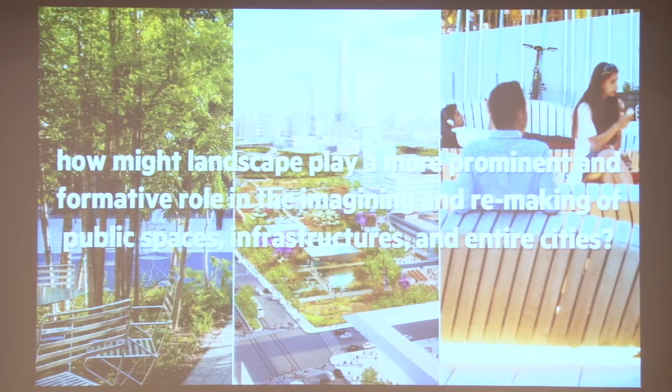The firm itself is a landscape architecture firm plus urban design plus planning. From the moment I started the firm, I had this question, or a form of this question, in mind: how might landscape play a more prominent and formative role in the way that we imagine and also remake public spaces, infrastructure, and entire cities? This is not a landscape architecture that starts with plants or horticulture, although that's very much a part of it. This is landscape architecture that starts from the position of city making, of large-scale systems, of large-scale infrastructures, and how it is that we can coordinate these systems, sometimes at very, very large scales, in order to generate the work that we're doing.

So even though you will see flowers and lush plants in the work we do, that's often not our starting point. What I want to do tonight is give you a sense of what many of the starting points are for our work, and the breadth of issues we've been taking on in the last few years.

As Cathy says, I teach, I do research, and I practice. Oftentimes, teaching is a great opportunity for me to step back from practice and take on bigger issues of climate change and what their implications are on the way that we make cities, the way that we live.

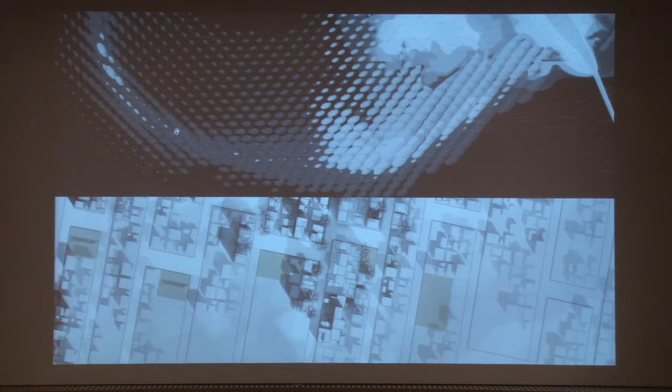For a number of years, we've been working in and around New York City, looking at very dynamic coastlines and how you begin to plan for development, plan for city fabrics and neighborhoods in ways that acknowledge those dynamics, trying to find a way to live with them as opposed to simply resisting them.

Some of the work is quite speculative. Some of it doesn't quite look like city making to the common eye. But there is a lot at work here that's looking both at the very basic building blocks of a city and at the same time at the way dynamic ecologies might begin to inform that.

I've also done some work, particularly in Central and Southern California, a lot of research on the extended metropolitan infrastructures associated with Los Angeles. We've looked at a number of systems, water systems, et cetera, and the consequences of those systems.

So this student pair did some work in the Owens Valley, a place that is now consumed by dust storms as a result of the lake being dewatered.

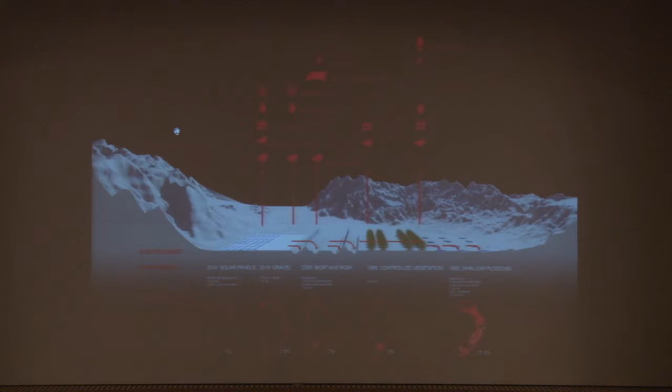These students were interested in cultivating new techniques for how to restore some of those ecologies, how to make what's going on evident to the folks who are out there on tours or doing visits, but also to look at ways that we might begin to replant or recatalyze some of the ecological processes that have been lost on sites like this.

I also do a little bit of research. Cathy mentioned a book I published with an ecologist last year. This book looked at the relationship between ecological research on one hand and design thinking over the last 20 years, and also looking forward.

When I learned ecology, I think when a lot of you learned ecology—not the students, I'm looking at some of the other folks in the room—we all learned about steady-state ecosystems, climax forests, those sorts of things, the idealized state of nature being this stable system.

That whole idea has been turned on its head. Now the idea is that environments are always in a constant state of change, a constant state of flux. And how do we begin to use that knowledge to inform the way we think about designing landscapes and designing cities?

The book itself has a number of essays, but also a number of drawings by ecologists. This is Richard Forman. The previous one was H.T. Odum, very famous ecologists who have had a lot of impact on the way that designers think.

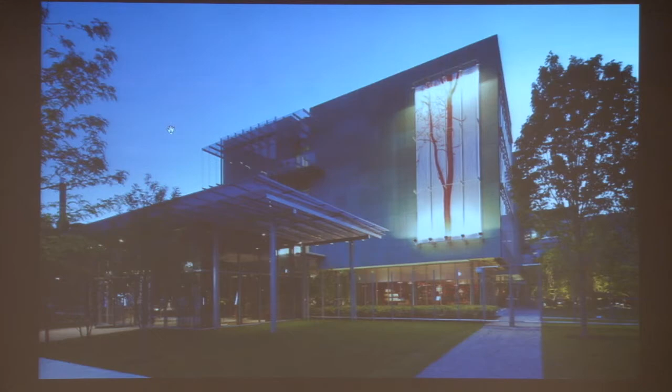The new building radically opens itself to the city, to the Fens, and to the landscape around it. It does so not only by opening the building to the gardens, but by creating very clear connections between the interior gardens and the exterior city. It does this on both sides of the museum building, so you always have a sense of the life of the museum and the life of the gardens as you move around and through the city around it.

It was also important, this is Renzo Piano, to set up these interior-exterior relationships. So now when you're sitting in the library, you feel like you're sitting in the garden. A lot of transparency was utilized here, and a lot of choreography of how we can use landscape to intensify architectural moments.

This glass corridor is the connection between the new building and the old building. You now enter the new building and then go through this glass corridor. As you do, you go through an archway of planting. The architect was very interested in making sure that landscape resonated in people's minds as they now enter the old part of the museum.

Things like the greenhouses were also now given a public presence on the street, so that the horticultural workings of the museum could have a public face.

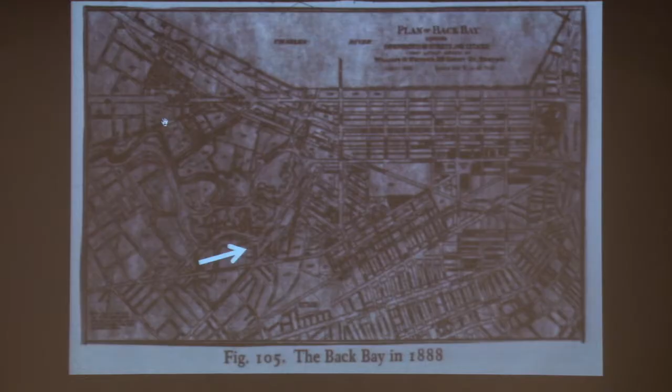What's interesting is that because it was all fill, all the buildings in the Back Bay in this part of Boston were built on wooden pilings. Over time, because we now drain all of our stormwater into pipes that go right out to the river, the groundwater level kept diminishing. That would expose the wooden pilings to air, causing them to disintegrate. Boston reached a crisis point where they realized a good portion of their 19th century building stock might collapse simply because the water wasn't there anymore to preserve the wood pilings.

So every inch of stormwater that now falls on a site like this has to be absorbed into the ground and returned to the ground in place, not carried off. There are extensive techniques using a lot of green infrastructure to simply allow the water to fall onto the ground. We're capturing all the water from the rooftops and putting that into cisterns, which then allow the water to infiltrate as well.

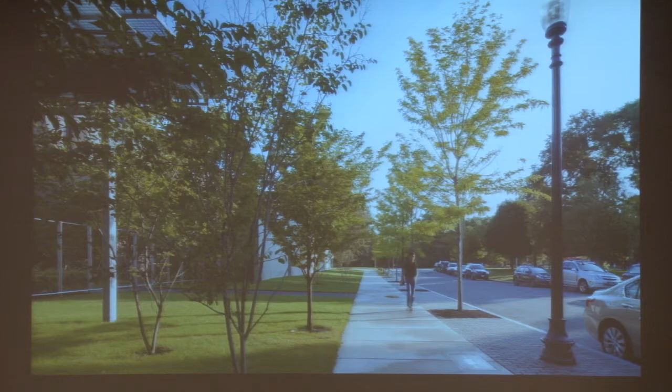That same strategy extends all the way to the curb here, with a very simple set of green infrastructure techniques: a continuous planting bed that nourishes the trees, structural soil, and permeable paving throughout. So every inch is captured and goes back into the ground rather than onto the street. Even the parking lot functions this way. It's quite an interesting situation where this hydrologic issue exposed a construction issue, and now the landscape has to be put to work to help correct this longer-term issue the whole city is dealing with.

In some ways, that project is really quite straightforward and simple in the way that it deals with water. At other times, we're trying to make these connections to ecology a bit more explicit.

It's the first time we showed up to a public meeting to consult with the public, and nobody from the public showed up to talk to us. So that was one of the issues. Eventually, a few condominium buildings were built along here, and in fact a river walk was being built along the Milwaukee River, and this became a pivot point to connect out to the lakeshore system.

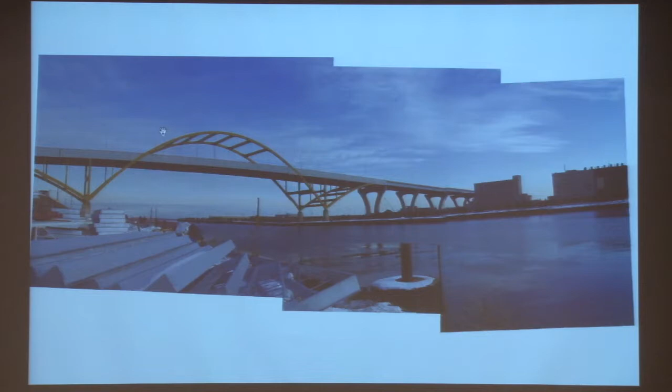This is the site as we found it. There was no ecology here. The site was dead. There were no environmental dynamics at all. So our simple goal in the project was to re-inaugurate some ecological and environmental life, and to make that evident to the people who might come here.

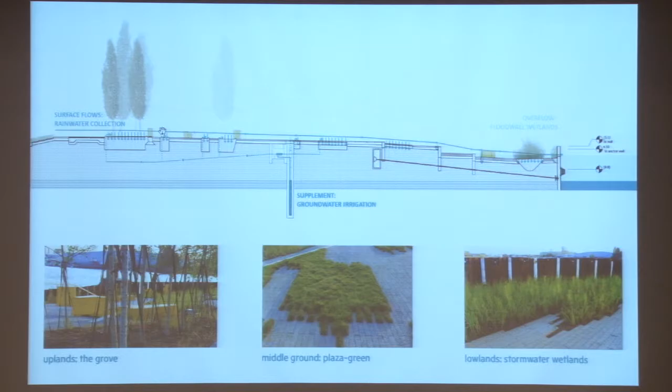We did that simply by redirecting stormwater flow that was already happening on the site. We captured every inch of it again and allowed the water either to infiltrate through the ground to the groundwater table, or to make its way down to the edge of the water, where we allowed the surface water to feed a new wetland, a reconstituted native wetland, very much like the wetland that had once been there before it was displaced by industry. So we're using this on-site waste resource to inaugurate new environmental change on the project.

At the upper end of the plaza is this grove that protects the site from the cold winds coming off the lake. That grove gradually opens up to a lawn and paving surface, and then the site steps down to this new marsh condition, a marsh which is incredibly luxurious in the way it changes over the course of the season. But it's really through the redirection of the stormwater resource that we're able to inaugurate a whole new set of environmental dynamics on the site.

What's interesting too is that this lower area of the plaza will flood at heavy rainfall. And you can see we've also cut slots into the bulkhead wall here so that when the river level is really high, we're giving a place for the water to go. So we're giving water a place in the city, in the plaza, so that people can begin to develop a closer relationship with the environment.

You can also see here how the plaza steps down as it approaches the river, which makes for a nice amphitheater setting where the performance is really the performance of the river, the performance of the environment that people are there to take in. And it's not just people who are new to the neighborhood or just visiting, but some of the old folks too, who have been there the whole time and are now getting cleaner water in the river, which is producing healthier fish populations and making their fishing days much more productive.

We also look at the potential to use building systems to generate or regenerate ecologies that had once been in places. We've done a little bit of work in Dubai along the coast of the UAE, a place where heavy development has displaced a lot of the native mangrove swamps that were there. So we took on a big development project to say, is there a way that we can use the waste resources from the development itself to feed a new set of mangrove gardens?

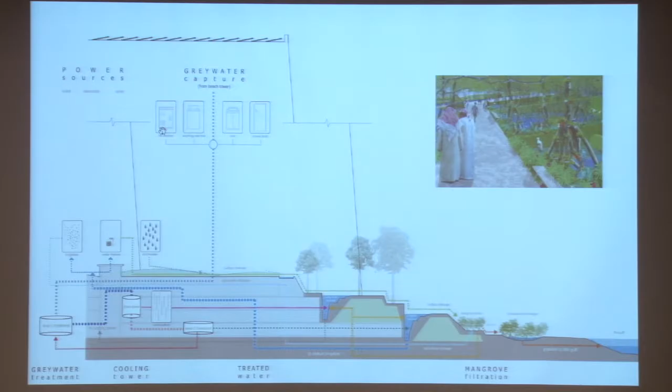So we worked with engineers on this development project to figure out how we could capture all the gray water, clean it, and use some of the landscape terraces associated with the site to help clean the water and upgrade its quality. And as the water became cleaner and cleaner, we would then create a series of gardens for people where we would recreate mangrove habitat, but in the form of gardens.

At this point, the mangroves themselves are also cleaning the water, creating new habitat, and you get this lush, shady set of gardens right along the seashore as a kind of cultural version of an ecological condition.

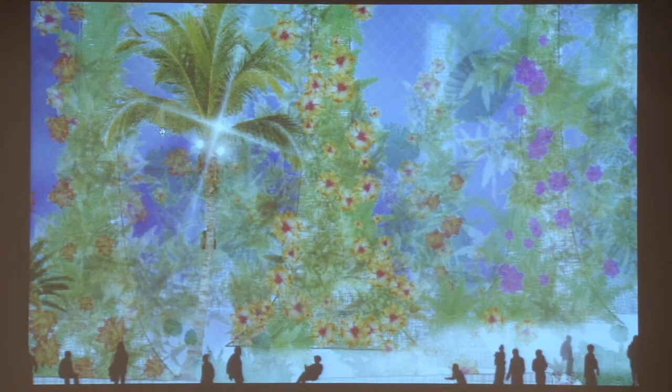We're also recently working with AC condensers and the water that's generated from AC condensers on a development project. Once the water from the air conditioning units is captured, it can be put under a dome into a big waterfall situation that creates an incredibly humid and moist environment, and then we plant a series of very lush botanical gardens in an enclosed space—not using new energy, but using the waste resources from the building system that's already there. So creative ways to use waste resources to generate new kinds of ecologies within the city.

All right, second question. These are not in any particular order, and sometimes the sequencing doesn't make sense. How can we bring a more playful approach to play?

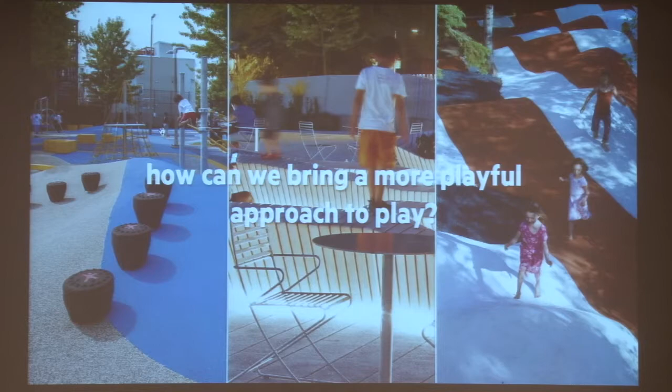I hate playground equipment. My kids sometimes hate playground equipment too. It's gotten better over the last few years. But for me, when my wife had them, I tagged along, I guess. I would watch as the kids just simply walked along the street, and they would make games of hopping from one manhole cover to another. Any marking on the ground they could make a game of. There's this idea about creative and free play—kids are especially curious creatures and they'll just make a game of anything.

We wanted to tap into a little bit of that and really explore the notion of play in the public environment. We became very obsessed with poured-in-place rubber. You see it in a lot of playgrounds these days. It's soft and squishy, usually made from recycled tires or sneakers or something like that.

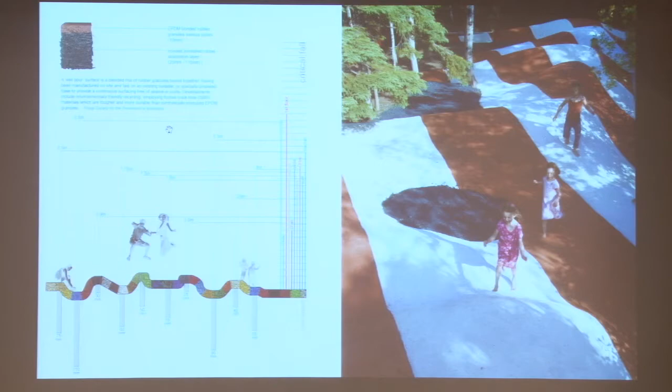Oftentimes it was being used in very flat applications, and we kept playing with the idea of introducing topography in order to create environments that we thought might be more playful. We tried this with a city project, and they were very worried that the techniques we were using hadn't been tested. So we had the opportunity to test this in a garden festival up in Grand Métis, Quebec.

This is a garden festival that's run every year. There's a set of old gardens, and they do an international garden festival with a number of changing gardens. We named our installation Safe Zone.

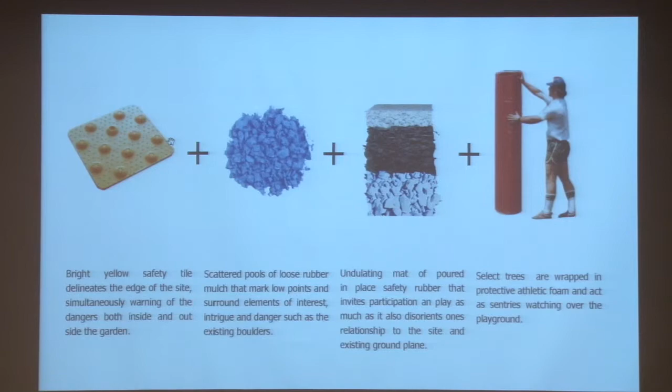What we did was use all the safety products that we could find that are typically used in landscapes—not only the poured-in-place rubber, but rubber mulch, warning strips to make sure everybody was aware as you entered the garden this was maybe not a safe place, as well as bumpers for trees. Essentially we sculpted the rubber across this very undulating landscape in order to create a number of conditions that we thought people might be interested in exploring.

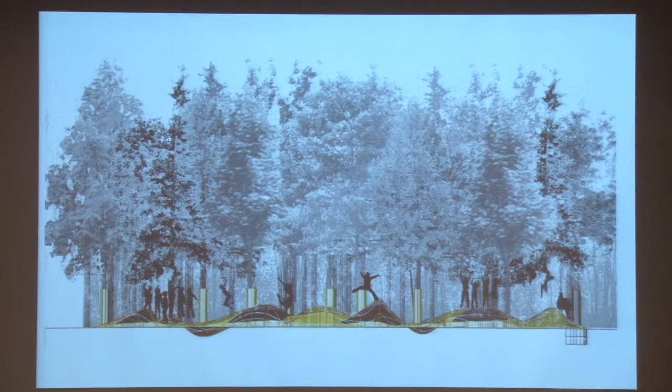Here you can see a three-dimensional version of it. We happened to get this site that was wooded, which was also great. The rubber is permeable, so it allows the water through to the tree roots as well. But since there were trees there, we thought we had to give those guys bumpers too, either to protect the trees from the kids or to protect the kids from the trees. We weren't quite sure. So this is what it looked like in its first version.

The yellow and black here is the poured-in-place rubber, and the blue is the loose rubber granules. As soon as kids were allowed into it, they immediately took to it and started playing games, running and bouncing over the surface. You can see here how they run up and down. Kids are amazing at the way they will just engage a landscape like this.

We were also fortunate to have the construction supervisor kind of push people into the project. He had to do that with adults—kids would go in on their own. He'd also encourage adults to take their shoes off so they could really feel the squishiness of it. We also did something quite insidious.

The code that you use for the thickness of the surface depends on the distance of your fall. So if you're falling from a high distance, you have to do a much thicker mat, which is much springier. And if you're falling from a low distance, it's a much thinner mat.

This has had a lot of impact, not only on the way that we design playgrounds now, but also in the way that we think of public space. We're currently working on an unusual project. It's a streetscape project that's meant for movement. It's in a tough working class neighborhood in Syracuse, New York. It's a neighborhood that suffers from obesity, and the client wanted to make a streetscape that was all about movement and encouraging people to move.

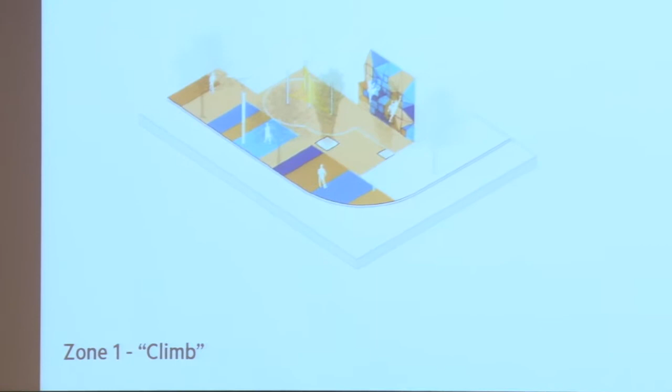This was a competition, so it's all about taking 5 blocks along the street, along with a couple individual lots, and finding ways to encourage people to move. So we have one site that's all about spinning, using spinny things and swings and all sorts of things. We have one site that's all about climbing, where we've taken the rubber surface of the ground and put it up on the wall and created an environment for people to climb up onto the wall of a building using netting.

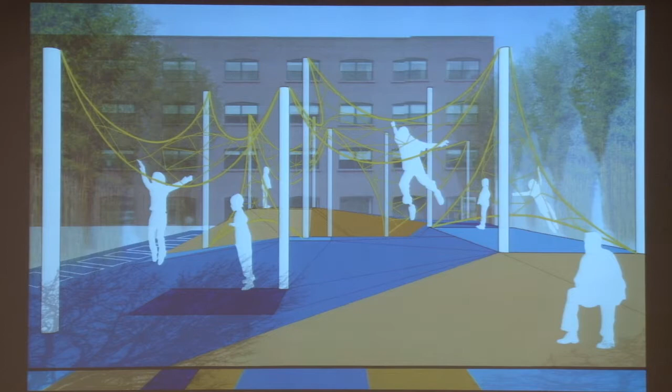And then probably the most fun part of it, the bouncy space. This is a space both with an undulating topography and an overhead net. You can see it here as a way to simply encourage people to get out and exercise.

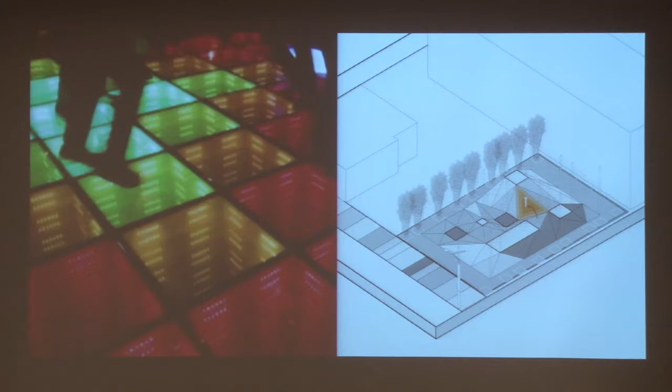But we've added a twist to this one in that we're also interested in using this technology called piezoelectricity, where as you bounce on a panel, it'll generate electricity, and in this case, will also generate light. So the idea is if we can embed this in the surface, as somebody hops around the site, different parts of the site will be illuminated, so they can create a game of moving around the site as they're bouncing from one place to another.

These experiments have all led to not just the way that we think about playgrounds, but the way that we think about social spaces and people, and the way that we design for people to engage public space, in ways that are sometimes familiar, sometimes unfamiliar, really engaging their sense of curiosity.

We're quite interested in the things that people do, not only when they're doing some activity or hanging out with their friends, but we're also interested in the odd and funny things that people do as well.

Or the way that people will find their own space. These are 2 of my favorite ladies who have decided they're going to make their own street front cafe by squeezing themselves in between 2 cars. This is just the stuff people do. And we want to play on that, play off that, and use that thinking as we begin to design public spaces as well.

And so the question here becomes, how can we instigate social interactions and animate social space? Not landscape as a background, but something that really encourages people to get out and do things.

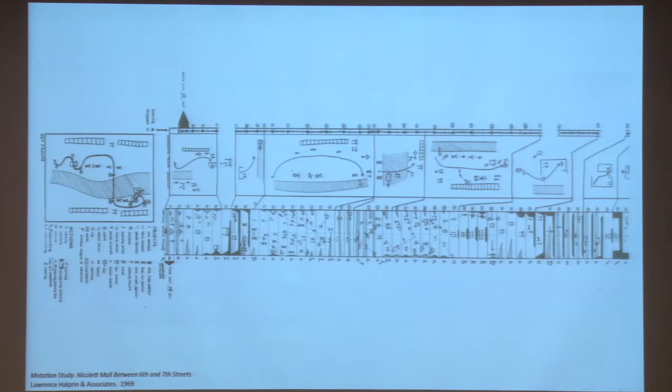Of course, there are some historical references here. This is a drawing by Larry Halprin, a landscape architect. This is the Nicollet Mall project. Of course, his wife was a choreographer, and so they made all these notations about the way people might move through public space, and then we kind of build a design around their movement.

We also refer to the work of William Whyte, who studied people's behavior in public spaces, not as a designer, but as a sociologist. How is it that people moved, in this case, across the plaza in front of the Seagram's building in New York, according to the time of day, whether it was lunchtime or not, and according to where the shadow of the buildings nearby fell.

And so in even these mundane spaces, he was finding some really interesting information on the way that people behaved. We used some of that on the redesign of this space at Harvard University.

This is historic Harvard Yard here. This is a tunnel, a road tunnel that had been sunk so that the campus could be extended over. And we've got a 1972 building by Sert, a historic building here. There's a Pete Walker Tanner fountain right at this location, and of course some of the oldest buildings at Harvard Yard here, as well as new dorms from the 80s here.

So, complicated site. Harvard finally gave us a project, and they gave us their toughest site and said, go at it, but you have no ground. There's nothing underneath you but roadway.

This is the site as we found it. Pretty bad shape. It was really a cut-through site. 10 to 15,000 people a day, we're told, moved through this space. But they moved as quickly as possible. There was nothing to do in that space. Sometimes the weather was really raw. And you can see it's quite worn out.

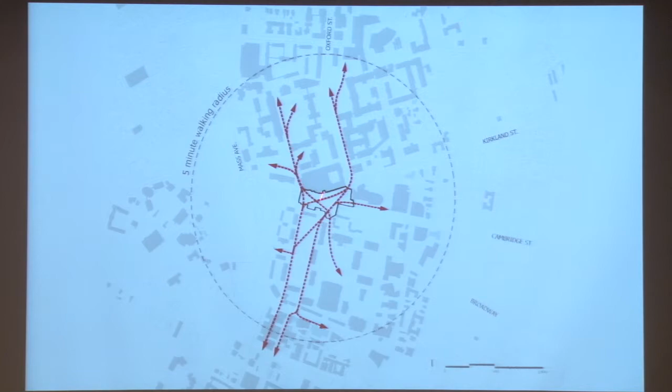It's fairly narrow paths. You had tour groups. The university would often put tents out there, but the tents would become quite muddy during events if it rained. So it was an overly used space, but it wasn't designed for any of these uses. It was intense in terms of circulation because you had all the folks moving between the main campus and the north campus of Harvard, but also this is Harvard Square, where there's a T-stop, and you've got people moving through that space to their residential neighborhoods to the north as well.

So we had to design it to accommodate flows of people first, and of course we choreograph the ways in which they might move through that space, but notice we're not trying to keep them on individual pathways. We're creating a surface where people can move across that surface a little bit more fluidly.

The surface is very simple. The project's very simple. It's really about pavers and benches that accommodate not only movement of pedestrians, but also movement of bicycles through that space.

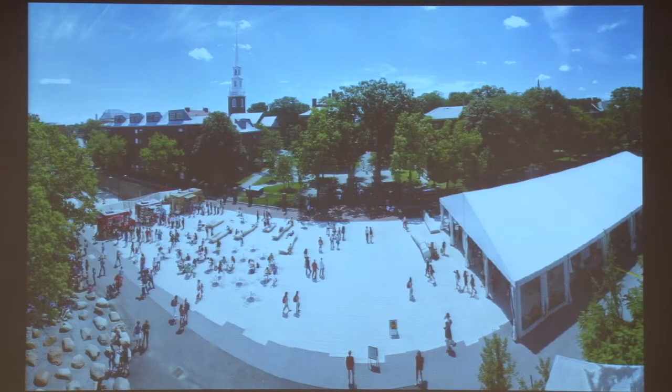In some ways, it's a radical transformation. It looks simple, but the surface itself is really highly engineered. You've got tent foundations, utility hookups, water, power, lighting, all the functions you need in order to host an array of events on a changing basis.

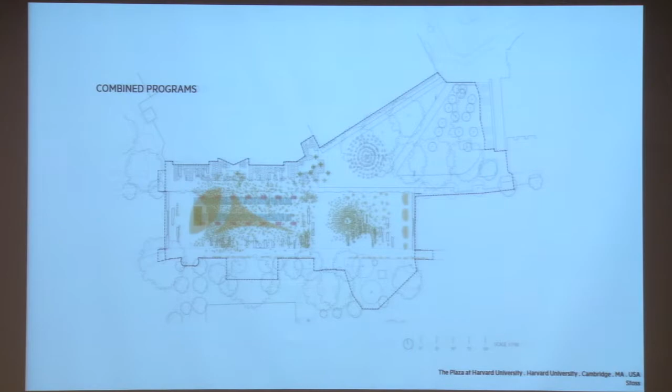The university was very interested in using this as a central destination space for people across the university community and the community at large to come together. So we began to design the space around different configurations of programs and activities, setting up the site in different ways and allowing a built-in flexibility that allows for things like crafts fairs, music festivals, lunchtime concerts, farmers markets, boxing matches by the student boxing club, formal performances by folks they bring in, ice skating during the winter, even curling during the winter.

You can see a little bit of the snow from this past winter. So it's become even a space for public protests. This was the first time - the university has been so good at programming the space that it wasn't until this past December that the space was quiet enough for students to lead a protest. And it was great to see it being used as a real civic space.

And so we have our own choreography, our own schedules about the way that space is constantly utilized as this new flexible space. But we also wanted it to be used for the everyday. It wasn't just going to be a destination space that was then empty the rest of the time.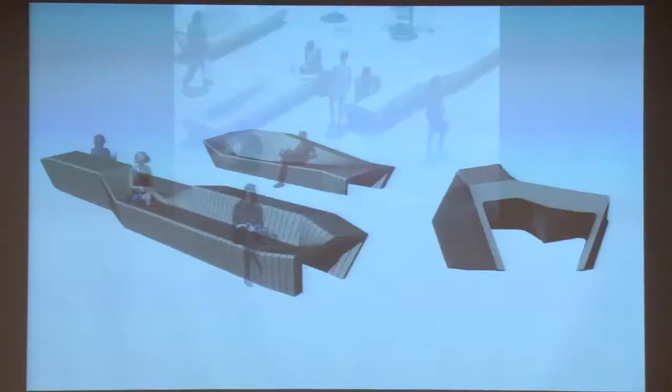So we took care to design seating in ways that would encourage people to linger. We have a philosophy: if you give people a place to sit, if you give them food, and you give them something to do, you've pretty much created a pretty good public space.

We spent a lot of time on the seating here. We were interested in creating benches that weren't one type fits all. So you can see here the way that these benches work - they have different heights of back, different elevations of where the seat is. There are also variations in the surface of the seat so that you can have one, sometimes two people. The idea was to create flexibility within the seating so that people could really pick their own place.

They could find the spot that's most comfortable for them, for their bodies, or would best fit their mood for that particular day. So you can see people sitting, lounging, chilling out here. This guy's scratching his belly at lunch, but he's found his own place to be comfortable within that space. A mother and some kids.

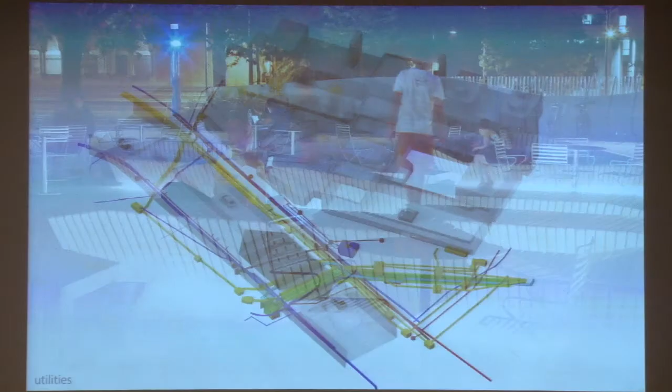These sorts of benches are designed in a way that allows people to find the place that's most comfortable for them. It's used in conjunction with movable furniture that allows people to move things around as well.

A very complicated project with a lot of utilities, but even the real hardcore infrastructure of the project is civilized. This is a crash wall that prevents a truck moving at 30 miles an hour from going over the edge and landing on traffic beneath it. But we designed these crash walls so that they would have wayfinding signage, incorporate seating, and even have a bike rack at the symbolic heart of the campus.

They were well designed to play on light conditions. The concrete elements had a number of different wayfinding devices.

This guy looks like Alex Krieger. I don't know if any of you know Alex Krieger, the urban designer. It cracks me up that a guy who looks like Alex Krieger, who's been teaching at Harvard for many years, needs to look at our map to figure out how to get around.

But of course, the site also works in terms of utilizing stormwater. A lot of the stormwater is collected off to the side where we have a little patch of ground, and we use it to water this really intense planting grove, with garden spaces carved out of the grove so that you have quiet areas alongside more active areas. Again, you're giving people choice and flexibility to do what they want to do while they're there, as opposed to doing what we think they should be doing.

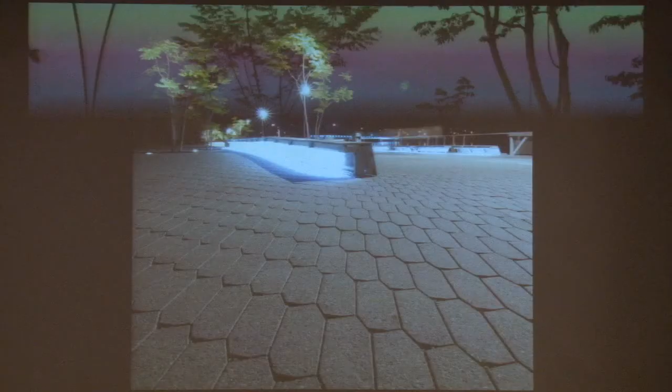Planting here was tricky. Every square inch needed to be paved, so how you then plant within a context like that is quite tricky. The entire surface, or much of it, is a permeable paver that allows water to infiltrate. So we're watering all the roots through high-tech soils, structural soils, beneath the surface.

We also use grade changes to allow for infiltration of other water underneath some of the benches. So where this light is emanating from under the bench, there's a slot that's doing a lot of work collecting storm water and infiltrating it into the ground.

The lighting itself becomes a kind of celebratory thing that changes over the course of the evening. And it's become a place that crowds now come to because there's something to do, a place to hang out. The city, in conjunction with a number of nonprofits, has started to program the space with year-round activity so that people keep coming back and activating that space.

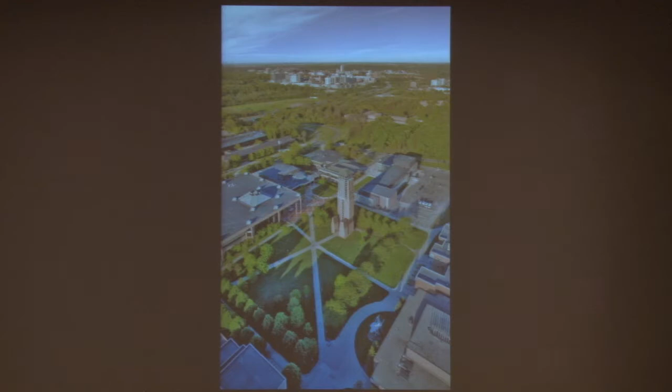We're working on a new project at the University of Michigan: a new campus quad at the heart of North Campus. The main campus is here in the distance, and the expansion campus will be on this North Quad. Currently there are a lot of engineering buildings, the architecture building, and a new performing arts center, but it's also meant to be the new center of university expansion.

So this quad will become the new center of campus life on the North Quad. It's a simple quad, but really kind of monofunctional, meant to get people from one place to another through it. The university was interested in activating this space, and the engineering school dean was interested in the role technology might play in that. So we're redesigning the space to activate it in a number of ways. This is a 4-acre space, as opposed to Harvard's 1-acre space.

This is a space that will remain predominantly green and will still accommodate a lot of the circulation moving through it. But we've done a number of things that are somewhat subtle but amplified here. Instead of straight paths, we've designed paths with areas that allow the path to grow larger, creating little gathering spaces along the way. We've also designed a series of landforms to give a little height and contour, but also to give students a place to hang out and watch the activity on the plaza.

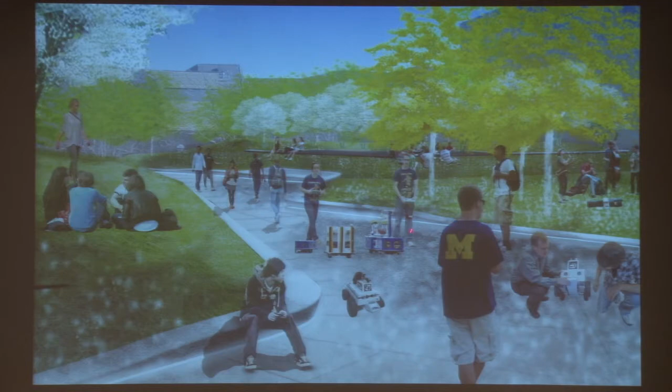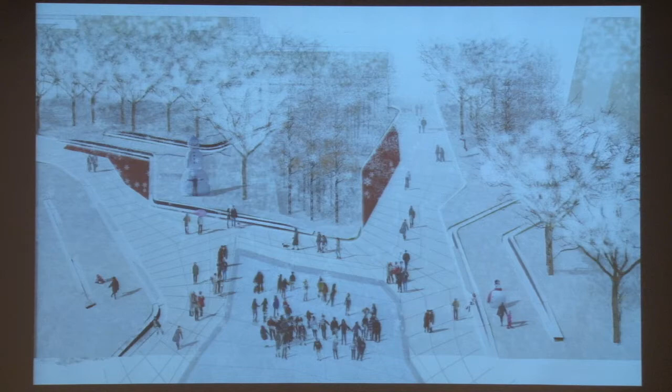The engineering school is good at programming with a lot of their robots and experiments, and they'll often use this space to showcase their work. But it's also a flexible space for different kinds of activities. Here you see it on a normal day, here where there might be a bigger concert, an opening school fair kind of event, or even when you import an ice skating rink for a winter festival. So we're designing something flexible, with all the infrastructure it needs, creating a space good for everyday hangout but also allowing different activities over the course of the year.

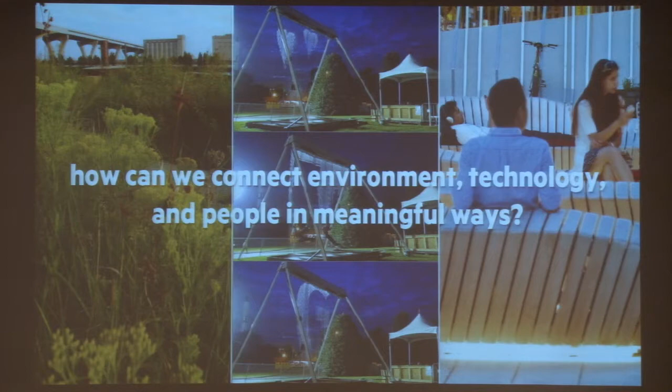The twist on this is yet another question we've been working on in the practice: how is it that we connect environment, technology, and people in meaningful ways? We wanted to move beyond the stormwater infiltration garden, which has been done over and over again, and somehow make that process of capturing and collecting stormwater resonate with people.

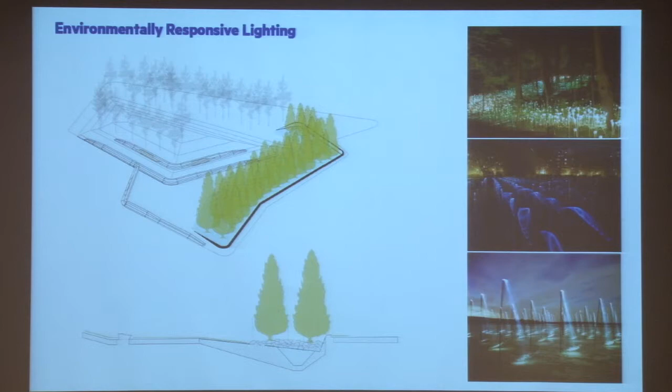We have 5 different stormwater gardens, you can see them here—these are larch trees, here, here, here, here, and one more behind the tower. Essentially they collect all the stormwater from the site into these gardens, planted with prickly larch, ferns, and other plantings below. But we've introduced environmentally responsive lighting within each garden. Every time it rains and stormwater moves into the garden, these lights will flicker, giving a lighting effect that signals to people what's happening in the environment. It's a way to bring this environmental process to life through technology in very simple ways.

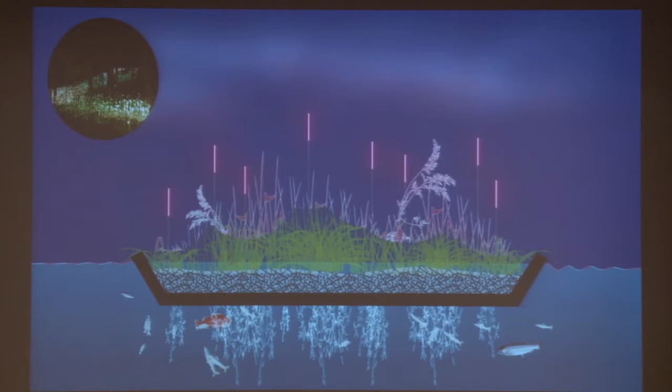We're also experimenting with some floating wetlands that feed fish, and when the fish feed, there's also a twinkling effect on the wetlands.

This one is part of a project we just lost. It was a competition, so there's still a lot of sad people in the office right now.

But this is one where we try to use various technologies to really play with environmental phenomena. This is on the lakefront in Toronto, where they get a lot of fog, on a site that's sort of a viewport. It's also a ferry terminal for getting from downtown to the islands in Toronto Harbor. There are very simple issues, like you can't see anything, the wayfinding's terrible, the existing site isn't well designed, so there are ways we're opening up views and that sort of thing.

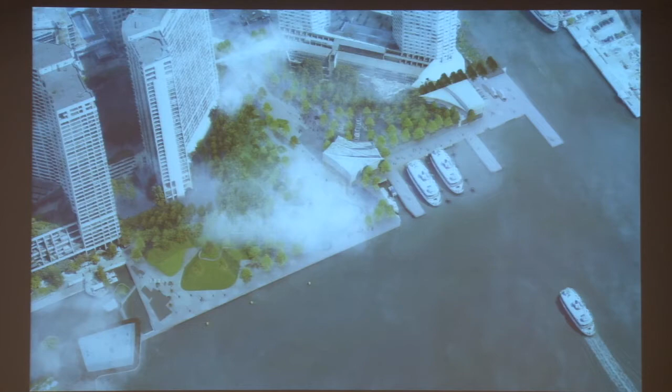We also wanted to create this fantastical place that really played off of and played with the environment, using that as a way to immerse people in a set of environmental conditions that would have a real impact. So this project we called Cloud Park, and we thought of the cloud in a number of ways, thinking about how we could use not only environmental effects, but created environmental effects, to really condition the way people would experience this place throughout the seasons.

We started with a fog gateway as you would enter the park. There's an old bridge here, and we wanted to create a cloud gateway that would begin to change and evolve as the wind blew and as the weather changed, creating this dramatic marker.

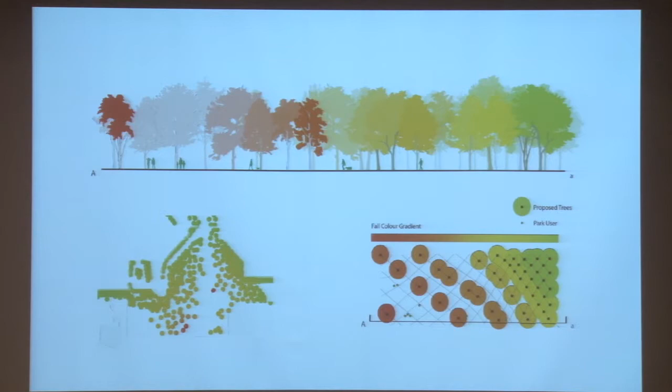We thought in many ways of the tree canopy as its own form of light cloud of foliage, which would intensify in certain ways and dissipate as you move toward the center. We could choreograph the fall foliage of the trees so that the most colorful trees were at the center of the space.

We also looked at a water and ice plaza that would mist during the summer and create some warm fog for ice skating during the winter.

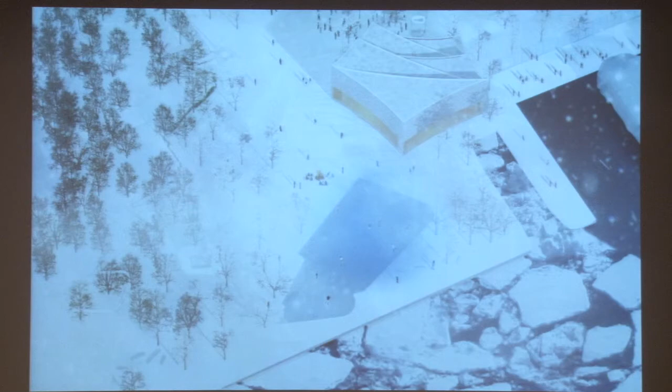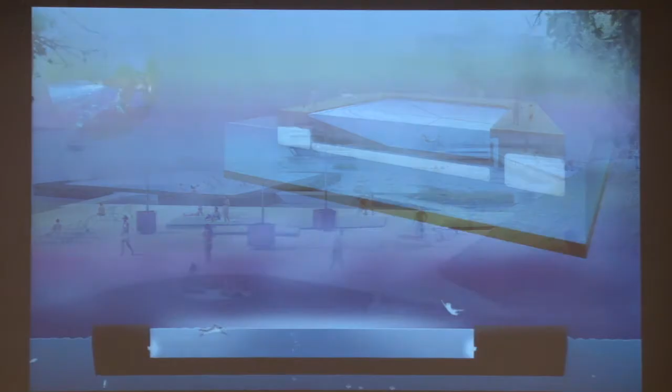We set up a series of floating pools in the basins to create places not only to look over the basin, but to actually get into it. Here are the floating wetlands, floating swimming pools. Here you can see some of the steamy swimming pools, misting to cool people during the summer months, illuminated at night to create a dramatic effect, and a series of floating hot tubs that would let people be in the lake in winter, bathing with some friends. I'd go there.

It's also about realizing the environmental phenomenon can be the marker itself. Everyone kept asking, next to this skyline and these big buildings, what are you going to do? Rather than create a thing, we were creating a spectacle out of the fog itself, something that would constantly change and evolve with the environmental conditions. So again, how do we bring the environment to life using technology?

We also do a lot of work with design and fabrication techniques. I'm going to skip over this one. We design a lot of furniture.

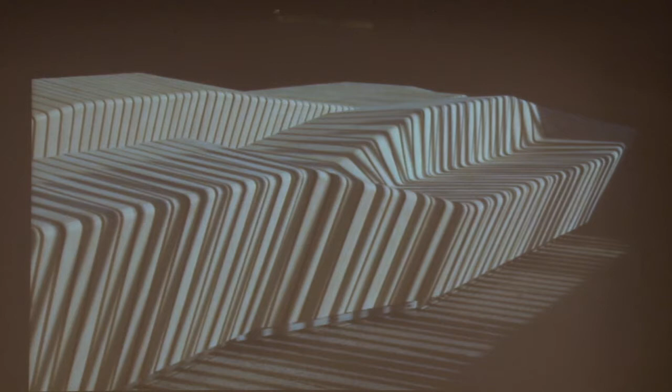We use a lot of new software techniques to design these things, because instead of creating a single bench, we can create a number of different bench conditions very quickly using these techniques. Those software programs fit quite comfortably with the way fabricators work now.

On the benches at Harvard, you can see there's a lot of testing we do in terms of the initial form making, and the evolution of how these things are put together and how they work. On this, each of what looks like 29 different benches is actually only 7 different benches, but each rib on each bench is different. They all taper in a particular way, which seems complicated, except all of that can be computer generated in the fabricator shop.

Also, if one of them gets damaged, they're all numbered, so all they have to do is lift it out, call up the number, remake one of those ribs according to the number, and it's a fairly easy fix.

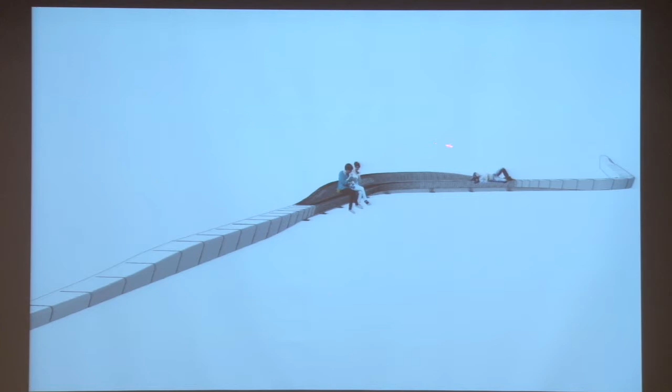At the University of Michigan, we're doing a different kind of bench. This is a snaky bench that starts at a curb, becomes a seat wall, then becomes a bench. Here you can see some of the sinuous forms.

We do a lot of the testing digitally, but these models just came yesterday to the office. So you can see we're testing form, shape, fabrication techniques, the way people sit, the way people can be agitated while they're on the phone, the way she can be quite relaxed there. These are going to be embedded within the landscape, within landforms, so we're also testing the way that they interact with the landforms we've designed.

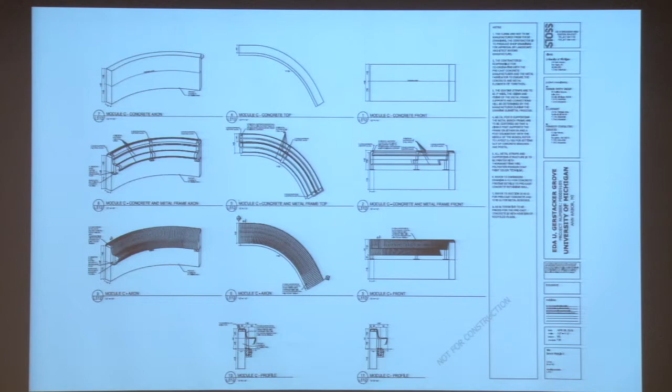And then all of these, it's essentially a kit of parts. These are all the extended benches, all the different modules that can be recombined to make each of the different variations. So it's a very systematic process. It allows for customization because of the computer software, and it's one that's allowing us to explore new techniques, primarily right now with furnishings, but we can begin to imagine how that's going to impact some of the other work we're doing.

And my final question: how can we enroll landscape to reorganize and shape cities? We're not the first people to ask this question. Frederick Law Olmsted was asking this question in the late 19th century. This is the Boston Park system, the Emerald Necklace.

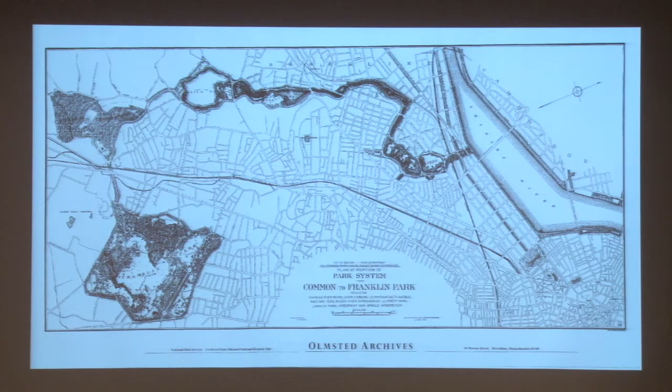And to me, these aren't landscape projects. These are city-making projects that involved flood control, new forms, new pieces of transportation infrastructure. This is a light rail system. You can see all the parkways that were designed around the fens as well. So this is a system of landscape meant to open up new parts of the city for development. In a lot of ways, it goes far beyond the recreational and even environmental agendas of a simple public park. These, in my mind, are city-making projects.

And we've been doing city-making projects for a long time. In fact, we've, in many ways, built our reputation off of losing competition entries. This is one of the first biggest competitions we lost, probably about 8 years ago. This is also in Toronto. We're getting really good at losing competitions in Toronto.

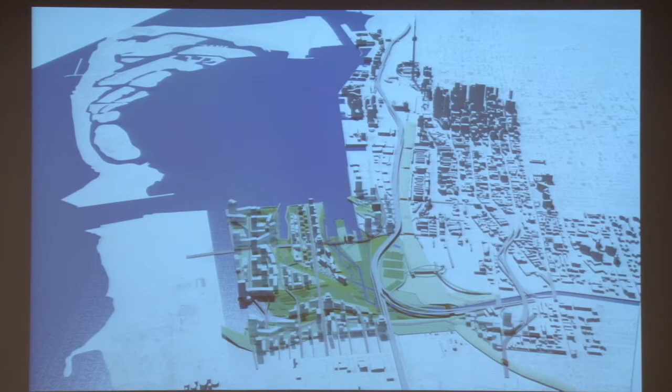But this is the mouth of a river that in some ways had been congested, crammed up and denuded. The client wanted to open up the river again, but also create some new urban neighborhoods. For us, it was a matter of not figuring out the city first and then giving the leftover space to landscape. It was really figuring out the river and the river ecologies. In fact, we spent a lot of time learning the breeding habits of fish in order to understand how this particular kind of river mouth needed to work, and then we built a city system around it.

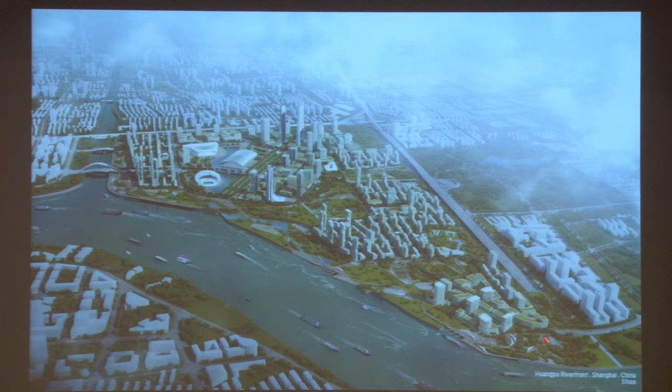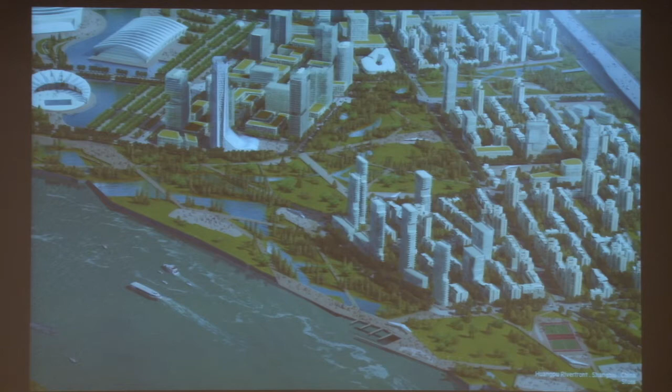We've done work in China. This is Shanghai, a big development parcel here, where again we're using a simple technique of landscape, using landscape to frame out the building plots in white. Starting first with the water—this is the big river, but there are a number of creeks moving through this. How is it that we can create water-oriented landscapes as a first move?

Water gardens, larger scale water landscapes. How is it that we use green landscape fingers to structure the new neighborhoods that would come? And you can see those neighborhoods are quite intense. I forget the anticipated population for this new development, but it was somewhere between 500,000 and 1 million new people. They don't kid around in China.

But also the notion that each of those fingers could then be programmed differently. In one, you could have larger scale sports and athletic facilities and bigger ceremonial landscapes. In others, more neighborhood recreation activities. In others, cultural facilities, et cetera. It was really this idea of fingers of landscape that would structure individualized neighborhoods where nobody had to walk more than 2 blocks to get to a big public landscape. That's a radical idea for China.

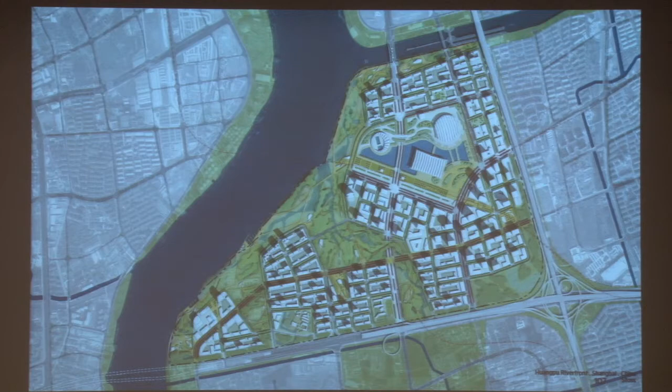I think the plan we inherited put all the development essentially over here and all the park over here. We ended up with the same percentage of park and landscape, but completely refigured the way that portion of the city worked. You know what? We won that one, and even when we win, we lose.

So this one we worked on with SOM. It was a developer competition. Phil Enquist out of Chicago was the lead on it. We went over, we won it, didn't hear anything. Three weeks later, he called them and said, hey, what's going on? We're getting on to the master plan phase now, right? And they said, no, thank you, we're building it. They're already, from our little booklet, laying out the roads and starting construction on it. So I don't know, who knows what it looks like? So we won, but we lost.

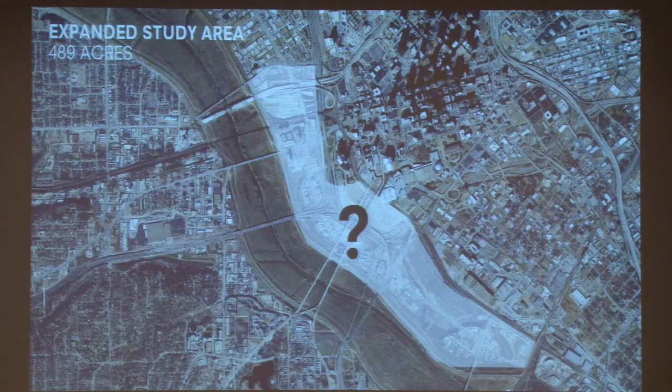And then the final project I'll show you. This is 500 acres in Dallas. This is downtown Dallas, and this is the Trinity River. The Trinity River used to be over here, but it flooded downtown in the early 20th century, so they moved the river over here. Now they miss the river, and now they want to be reconnected to it. The problem is, this is the stuff that was put in between downtown and the river. It's an absolute tangled mess of highway infrastructure, rail infrastructure, and all this other stuff.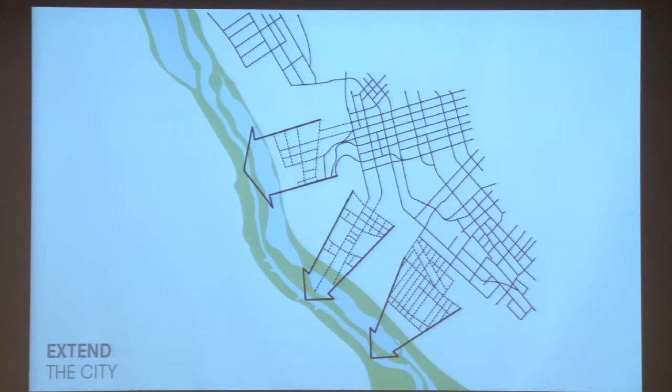And so there's a quirkiness to Dallas that we were quite intrigued by. The simple question: how do you connect the river to the city? First you do it not by creating pedestrian connections, but by literally extending the city fabric directly to the river, and then taking the river landscape and bringing it back into the city.

A very simple strategy, like the Shanghai strategy, that gives you this grid green rhythm that sets up new neighborhoods interspersed with lush landscapes. Landscapes that, frankly, would be built around some of the more difficult sites with the highway interchanges. So landscape in this way was being used to clean the air around the highways and, frankly, just to get it out of people's view.

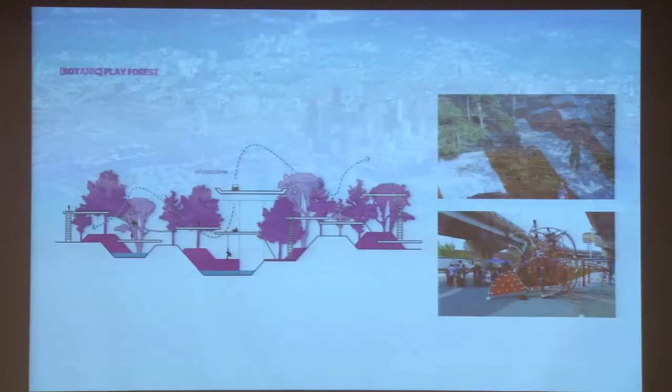And then to use moments like this to cross over and build neighborhoods directly across the river. The landscapes themselves would be programmed with uses bigger than your normal civic plaza in the city, but smaller than big nature. So art walks, art forests to display sculpture larger than you could get in a gallery, and also other kinds of activities, raves, nightclubs beneath the interchanges.

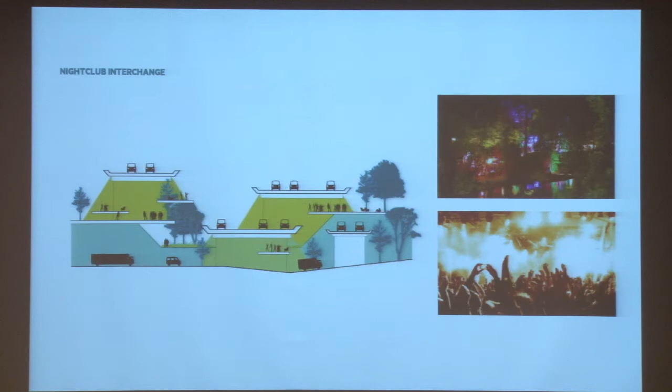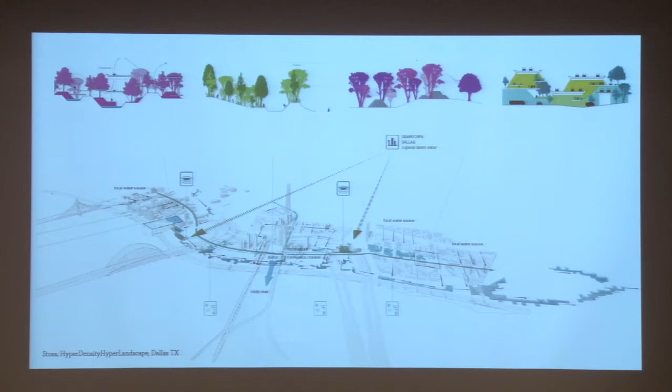We also wanted to revive the old river. Parts of the old river system still existed as the stormwater collection system for the city, before that water was then pumped inside the levees into the river itself. We wanted to bring that back to life, but of course it had to be a highly engineered system because it was collecting water from half the city. It was bad quality water, so we developed a system of water gardens, water cleansing wetlands that would upgrade the quality of that water and then use it, once clean, to become the centerpiece of each of the new neighborhoods.

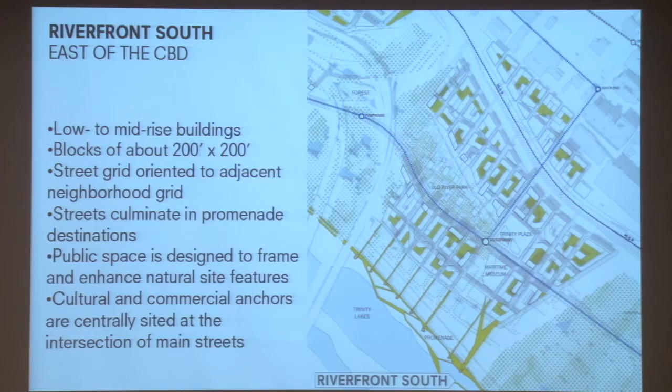So in the south, we had a set of aviary and music gardens, some of which would be fed by runoff and potentially gray water from the building systems, to set up a lush new landscape in the middle of a new mixed-use development with cultural institutions. This is the landscape piece at the heart of that new neighborhood. And here you see it as a mixed-use neighborhood, some commercial, mostly residential, with connections to existing neighborhoods back here, and these lush new music and water gardens as a center point.

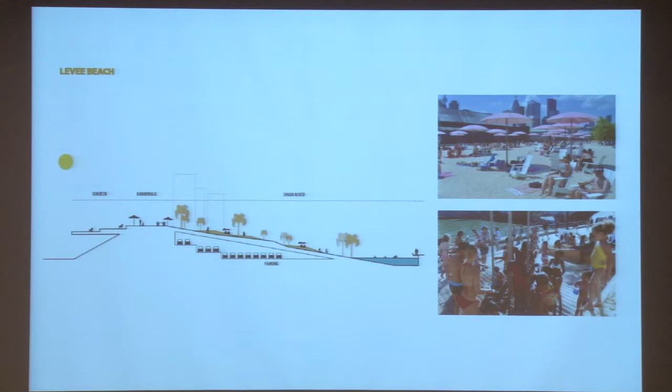In the north area, we designed a beach. We figured it's 95 degrees in Dallas a lot, so why not have a beach in the middle of the city, a place to kind of shed your inhibitions, overlooking the river on one hand, but also surrounded by the city with your own swimming beach and pool made from the clean water of the stormwater system. This would be a neighborhood that is design and art oriented, but also very mixed use.

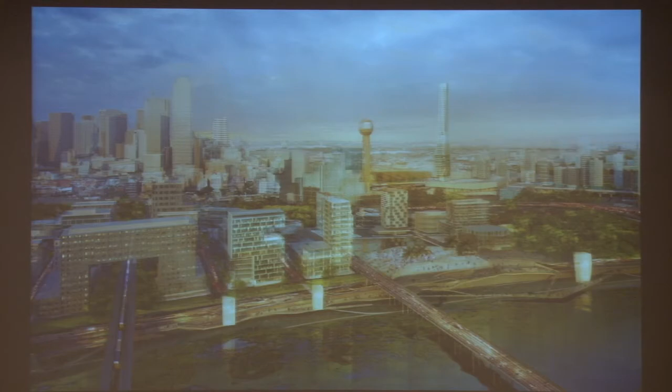And then finally, a water amphitheater, a new celebratory space for civic life, right at the center of some of the most intense development, that would become the central focal point not only for that neighborhood, but really for the whole city. On the other side, where it connects to downtown, a new water plaza. This is the existing train station, with a new high-speed rail station as well. So the project was also about making connections to other parts of the city and other parts of the state.

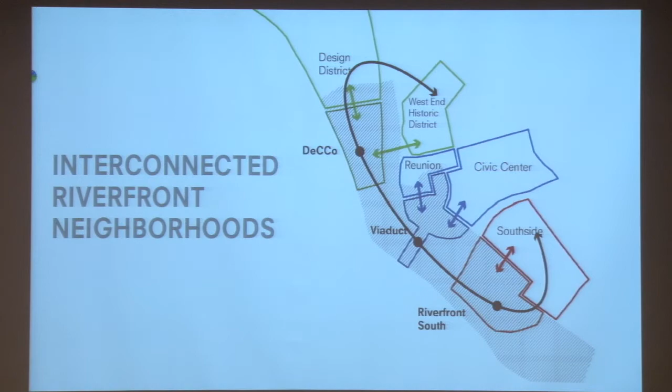So, three unique neighborhoods really organized by landscape, with landscape as the centerpiece, with a whole set of connections to existing neighborhoods, interconnected via public transportation, and then connected beyond the site to the city.

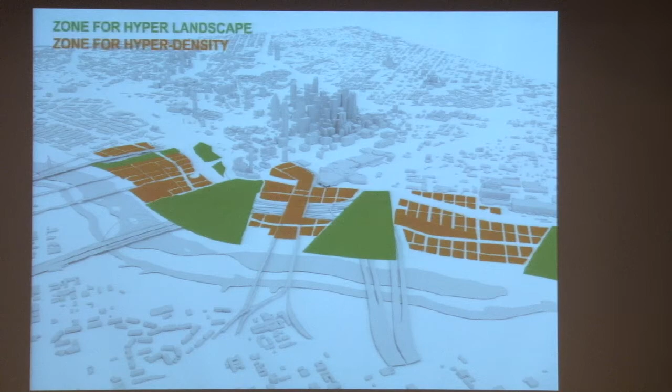In all, this is a project that's meant to be developed incrementally and opportunistically. It starts with a series of artistic installations that just grab your attention and get people down there, to celebrate this place along the river. It also begins with a set of nursery installations and events, getting people used to the idea of going down to the riverfront. All this takes place while a lot of the more complicated planning, zoning, and property deals are arranged. But there's also an idea that you invest a little bit at a time in the stormwater system. Those initial investments then become the center for private development to make their own investments.

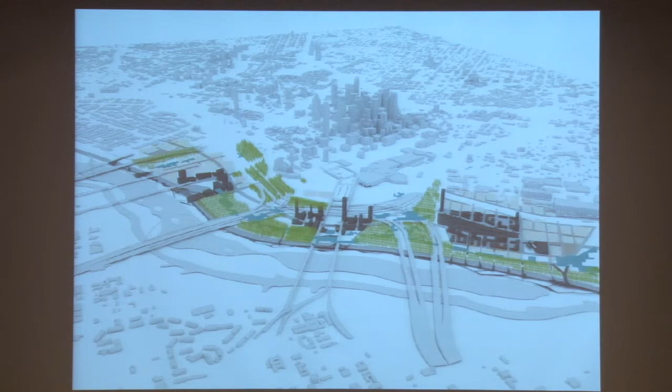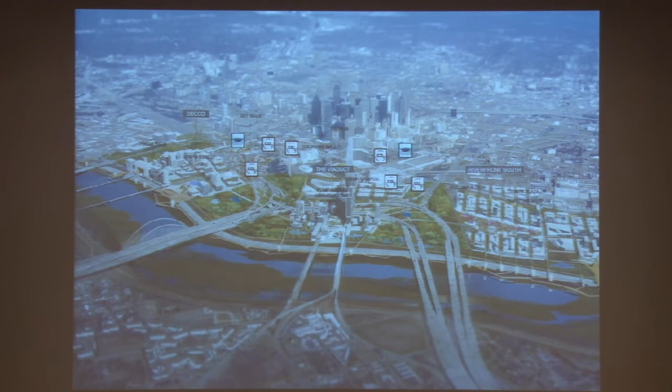You begin to build on each of those investments and go back and forth between the public and private realm. This doesn't require a one end to the other phasing strategy. It can be very opportunistic and react over time in ways that allow the project to continue to move, allow the client to build successes over time, and incrementally over a period of 20 to 30 to 40 years begin to realize this new idea of Dallas—a city framed by and integrated with its landscape.

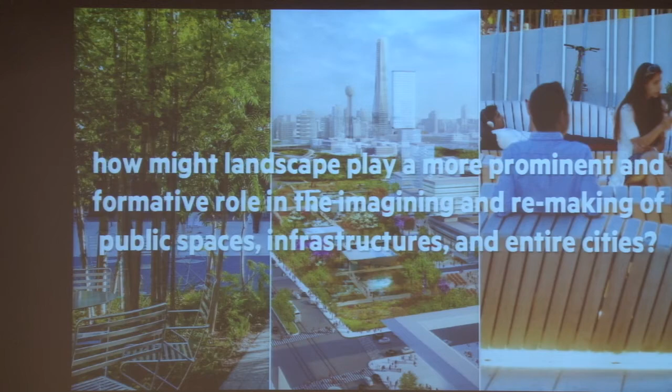Now, there are many other questions that we're dealing with as well. Food—how can we use food in landscapes? How can we use more tactical approaches to urbanism? I'll leave those questions for a different day. In all, though, I keep coming back to the question that we posed years and years ago when we started the firm: how is it that landscape might play a more prominent and formative role in the imagining and remaking of public spaces, infrastructures, and entire cities? Hopefully I've given you a little glimpse of how we're currently thinking about answering that question in a number of ways. Thank you.